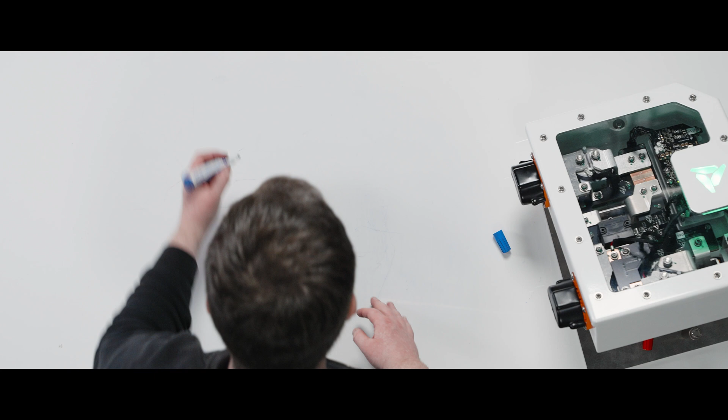So if we're to talk about today's most common fuels used in industrial markets, that's diesel. Diesel has an energy content of around 13,000 watt-hours per kilogram. It's a fantastic fuel, one of the most incredible substances in the world today because of this incredible energy density. The very best lithium-ion batteries that exist today at a cell level, not even accounting for the weight of the battery and everything else around it, is around 250 watt-hours per kilogram. This is an order of magnitude difference in energy content.

It's huge, nearly 50 times lower than what we get out of diesel fuel today. That's the first most important thing when we think about fire safety: the energy density of diesel fuel versus batteries is dramatic. That means that if something goes wrong with a tank of diesel, it's going to create a much larger thermal event, thermal incident, than an equivalent amount with a battery pack. Some of the big misconceptions with battery packs is that they're very difficult to combat the fire, very difficult to put out, and I'm going to speak in detail as to why that is. In some cases it can be true if you deal with the fire in the wrong way.

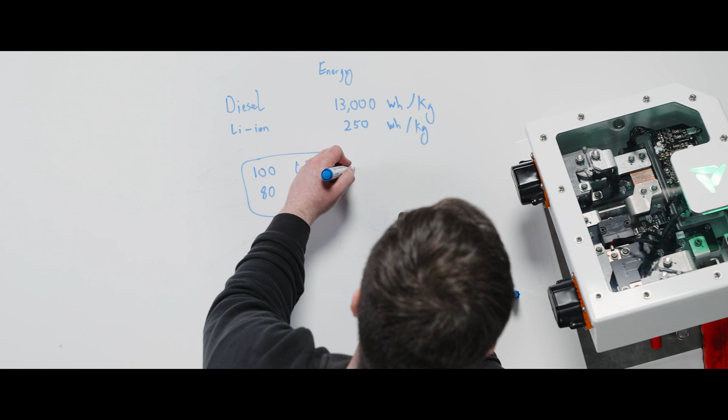So if we just use a simple example here of an industrial machine with a 100-liter fuel tank, that's approximately 80 kilograms of diesel. Multiplying 80 kilograms of diesel times 13,000 watt-hours means that this system, this 100-liter tank of diesel, has basically got 1 megawatt hour of thermal energy. That is a huge amount of energy in that system in comparison to what a battery could carry.

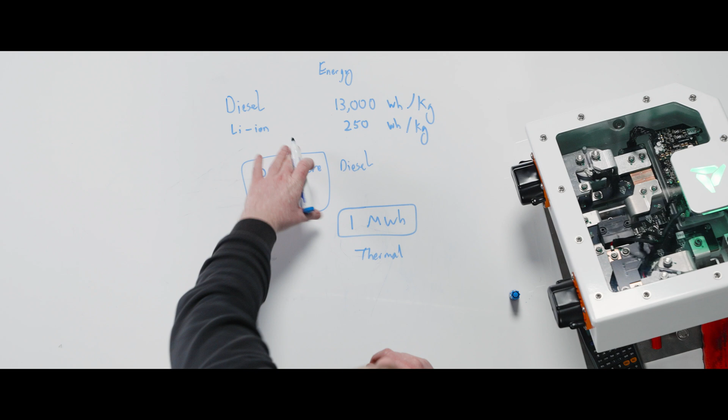The difference between diesel fuel and the battery is that the firefighting methodology we use for diesel is very different. By suppressing a diesel fire, by covering it in foam or blocking oxygen to it, you're able to put this fire out and maintain it in a completely extinguished state.

The difference with a battery is that in some cases it can be self-oxidizing. It's able to generate its own oxygen internally and continue to burn, but the most overlooked piece is that it's electrical energy. There is electrical energy stored inside of this battery cell, and that means you've got multiple modes of thermal runaway, multiple modes of fire generation, multiple modes of heat generation.

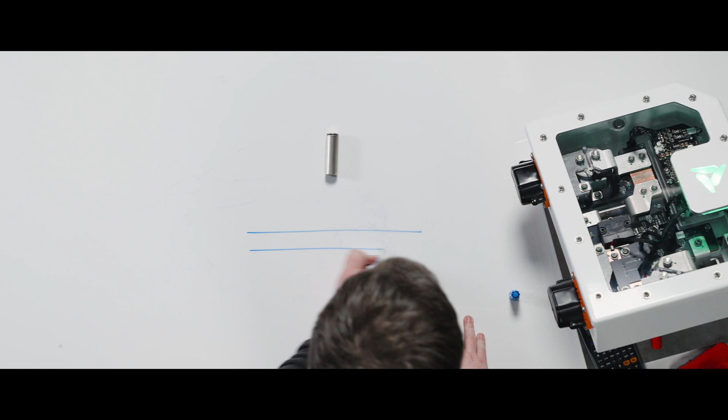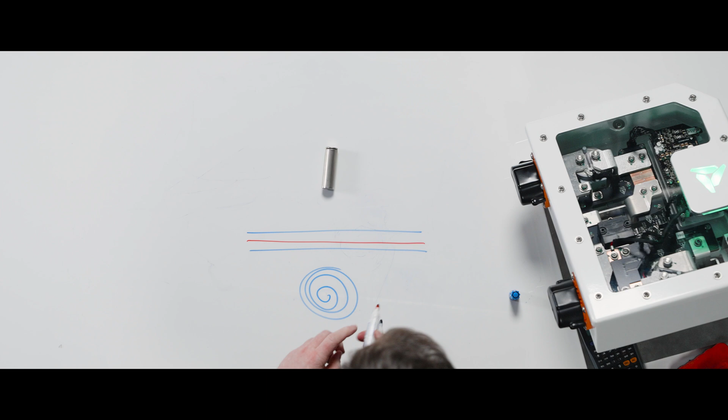So if we look at what actually happens in a lithium-ion battery to cause it to go on fire, it's quite a nuanced set of things that happen. Inside of a cylindrical battery cell, as we've shown in previous videos, it's basically something called a jelly roll. It's basically a plus and a minus, separated in a flat sheet. This flat sheet, in the case of this cylindrical cell, is wound up into a spiral, which enables you to have a functioning battery.

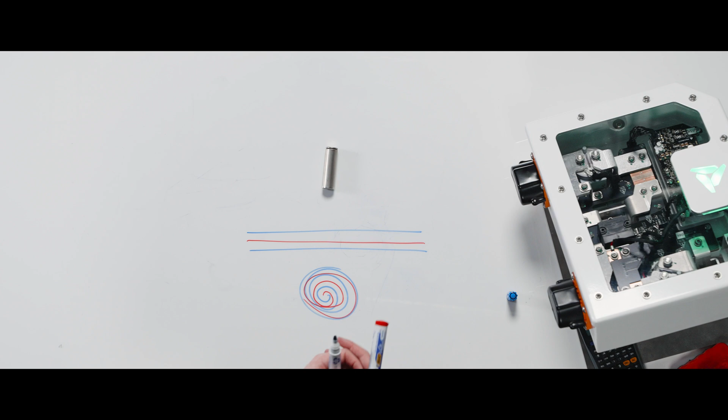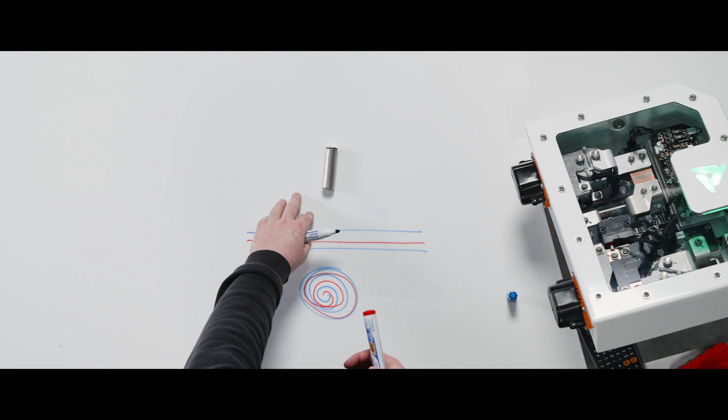This is containing electrical energy, and similarly, this red separator is a plastic. It's a little polyethylene separator material. A plastic can burn, it's like a hydrocarbon. You've also got electrolyte in there, a small volume of liquid that's quite combustible. It's almost like an organic liquid, like diesel, but only a small few droplets of it. So within the battery cell itself, there are things that burn.

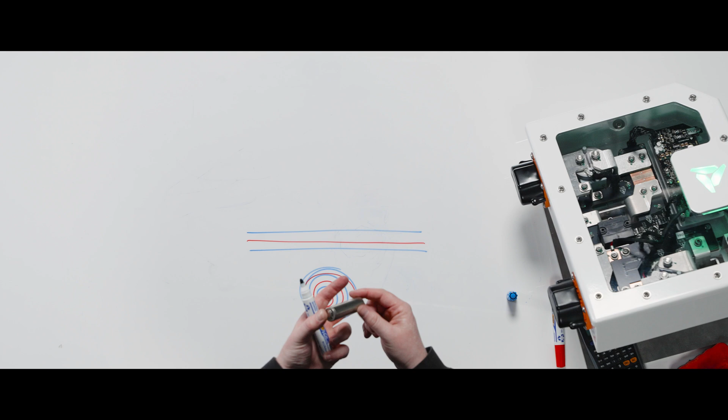It's like oil, there's almost a small bit of oil inside of the can before you even consider all of the electrical energy. So the electrical energy is the second piece here. If this battery cell were to catch fire and you're able to break down the separator and cause these two sides to touch, you're going to create an electrical short circuit. An electrical short circuit can generate a lot of heat because the current flows through resistive heating and builds up temperature very, very quickly.

So you can get multiple things taking place at once. You can get electrical shorting generating heat. So it won't generate a fire, it will generate heat and burning. That heat and burning will cause the separator and the electrolyte to catch fire, which then causes venting and gas generation, which causes more separator to fail and more electrical energy to be released. So when all of these factors come together, you can and do get thermal runaway. You do get venting of battery cells and fire.

There's a lot of different technologies on the market today to try and reduce this. Some things to consider: even within this plus and minus, your anode and your cathode, the materials used there have different stabilities. They're chemical compounds. If they get above a certain temperature, they break down, they decompose into other materials that are often flammable. So when we talk about different chemistries, LFP is very safe, it doesn't go on fire. LTO, you can put a nail through it.

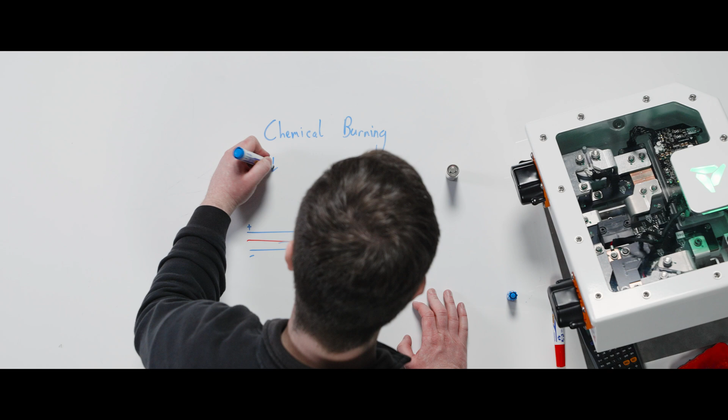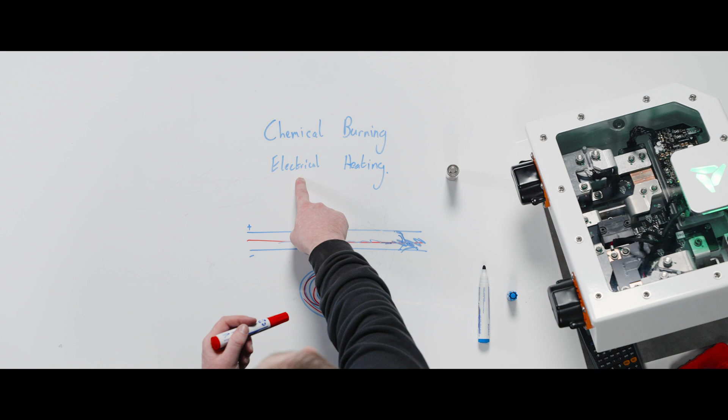But I have to be absolutely clear, given the right conditions, you can make any chemistry burn, thermally run away, or create a fire event. So understanding these two different effects inside of a battery - there's the chemical burning, there's electrical. The second one is the big difference from diesel. So when we talk about lithium-ion batteries versus diesel, diesel's got chemical burning, but it has no electrical heating.

The electrical heating is the source of most of the confusion on the market today. It's the source of most of the very interesting news stories and firefighting mistakes - that electrical heating, and the fact that the energy is always there, always on, can lead to a very key behavior that needs to be mitigated.

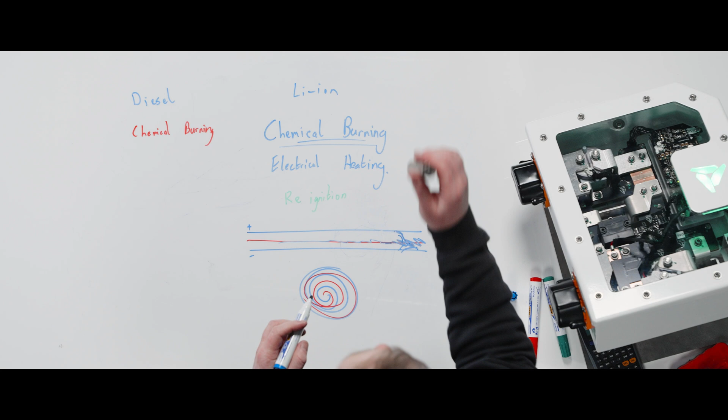That key behavior is reignition. The important thing to think about is that if you're able to cause chemical burning of the battery, you can extinguish that burning with any standard conventional method. You can put water on it, block the oxygen, and the battery cell will go out. The fire will stop, no different to a diesel fire.

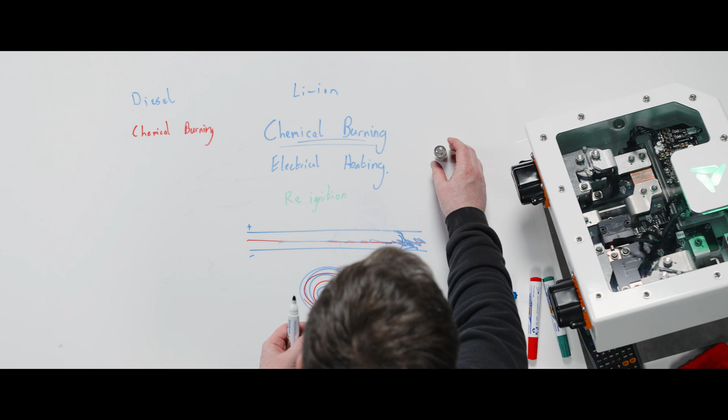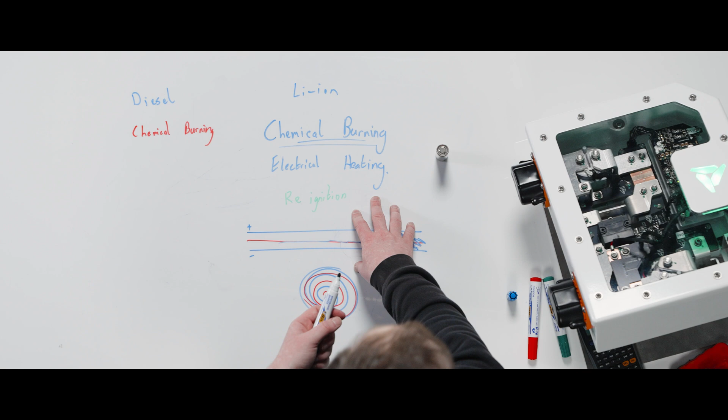The thing you possibly haven't achieved is there's probably still electrical energy inside the battery cell. If you've still got electrical energy and a compromised heating path, you've put out the chemical burning fire, but the electricity is still flowing, creating heat effects, and that might be enough to reignite a chemical fire seconds, minutes, hours, or even years later, as a latent defect. So you need a form of permanent suppression to ensure these systems can be made safe.

So that's what we're going to talk about next: first responders, what you should do, how you tackle battery fires. If you come across a vehicle, a battery, a system, this is based on the best practices we use here at Xerotech. There's a lot of information out there publicly, a lot of different scenarios, but what we advise our customers, the Xerotech philosophy, is based on real fires, real testing we've physically done ourselves. I personally have fought multiple lithium-ion battery fires during design, development, and intentional abuse tests. These are methods we've directly seen to work and be effective.

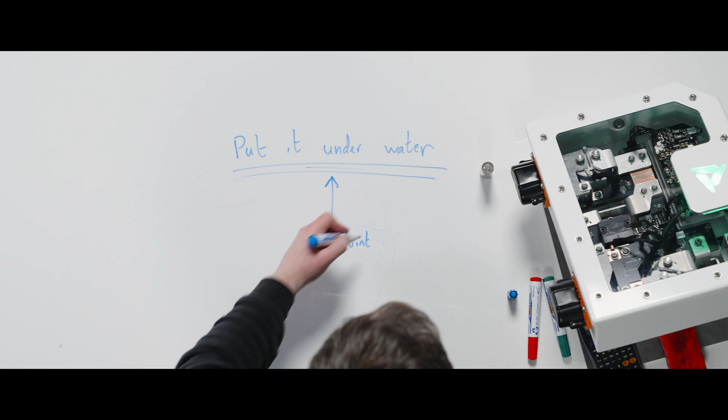The real simple case of how you deal with every battery fire: we have one rule, put it underwater. This is the simplest, most effective way to deal with a lithium-ion battery fire. In every case, irrespective of chemistry or anything else, this is the permanent solution to make a system safe. Everything else you do combating a fire should lead to this end point. Get the system underwater. That will put out the battery fire, suppress it, and make it safe for days, weeks.

These are some of the challenges with many solutions being sold on the market today, like fancy fire extinguishing agents and other strategies. They can usually deal with the early minutes or hours of a fire, but the problem is that real lithium-ion battery fires eventually end, and at some point everybody goes home. That's where the real danger happens, when something is left somewhere. What happens in the middle of the night or a week later when nobody's there? You need permanent suppression, a permanent solution, and that is the simplest, cheapest, most available solution in the field: fully submerge it underwater.

All the other approaches, like fancy fire extinguishing agents, blankets, everything else, are there to buy you time. They make the incident less severe so you can ultimately get it underwater, get it out of a vehicle, put the vehicle underwater, whatever the solution is. But the end point is to get there.

What should you use on a lithium-ion battery fire? Should you use special fire extinguishers designed for lithium metal fires, or fancy salts and suppression systems? Again, based on Xerotech's experience and all the fires we've combated, our recommendation is really simple, and that answer is water. Water is the most effective solution for knocking down a lithium-ion battery fire.

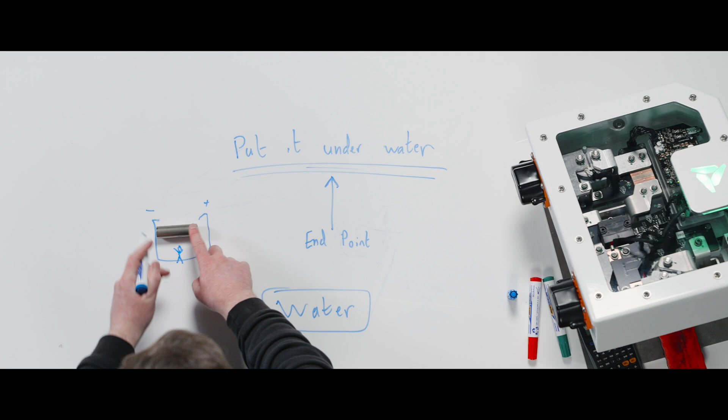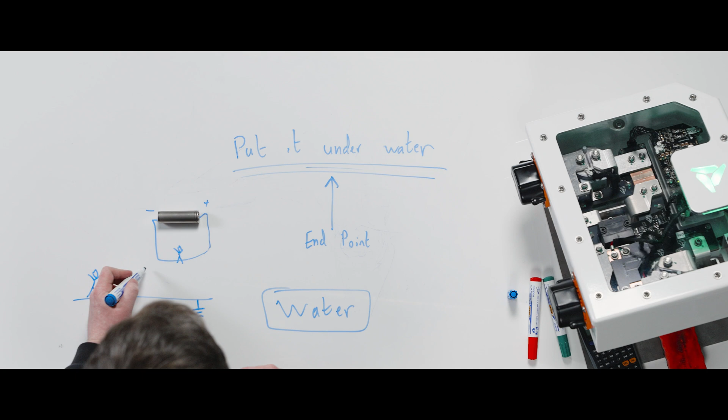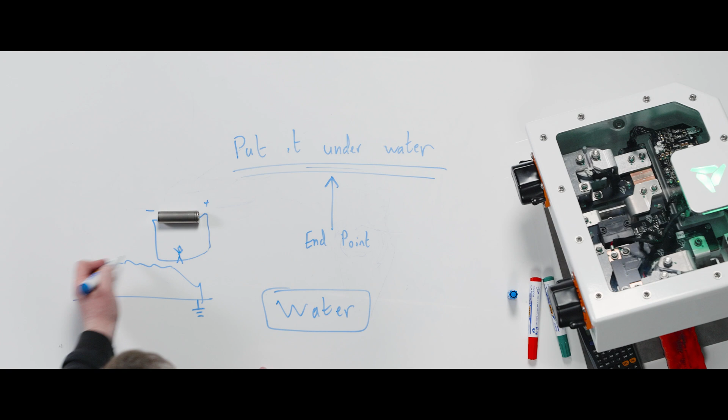So if you've got a fire hose, you'd have to somehow create a loop where you're in the middle and join these two things together. That's incredibly hard to do for a floating battery system. The reason you don't spray water onto an electrical panel is that you don't need to connect the second half of the loop, since half the system is already grounded and you're standing on the ground. So if you've got an electrical panel, one side is doing something while the other is connected to ground. If you spray water onto that panel, you're creating the loop and you're in the middle of it.

That's why you never do this with a ground-tied system or a system that's not floating. With a battery, it's very hard to achieve that. So in this case, if you spray water on the battery, you will create a joining of the circuit, but you're not going to be a part of that circuit. It's going to be inside of the battery box, internally shorting and dissipating its energy.

That's actually part of the mitigation strategy for putting it under water. You leave it under water. So to come back to a practical solution of how you put out a fire, we'd recommend as a general rule, if your battery box is a certain size, put it in a volume of water that's at least more than 3x the size of that.

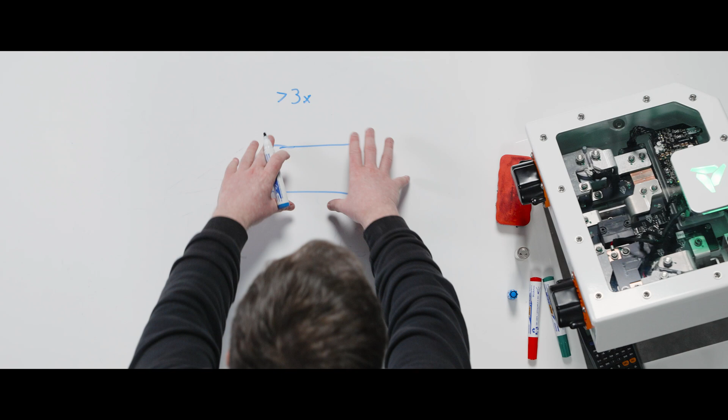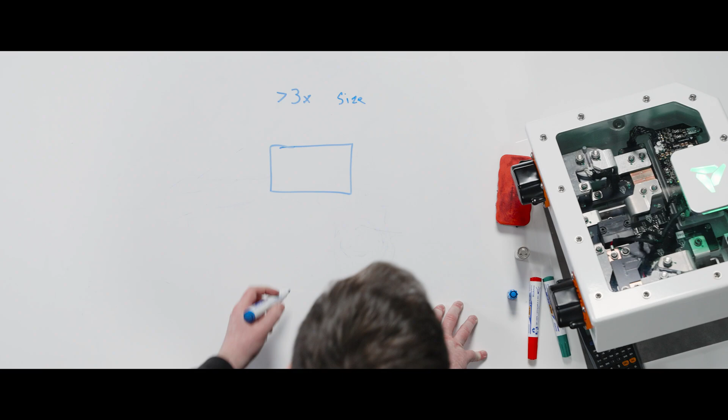There's a number of different reasons for this: if you have it in a small pool of water, there's not enough thermal mass in that water to keep the fire quenched down. So you want to have greater than 3x the size of the pack, and you need to think about practical solutions of how you'll do this, especially in a field application.

Oftentimes these are achieved with metal containers. Waste refuse skips are some of the most effective solutions we'd recommend for customers and early integrators - have a standard metal refuse bin, large skip, put the pack in it and flood the skip. Other effective solutions are large roll-on, roll-off skips that can be lined with a tarp to basically create a swimming pool and put the packs inside of it.

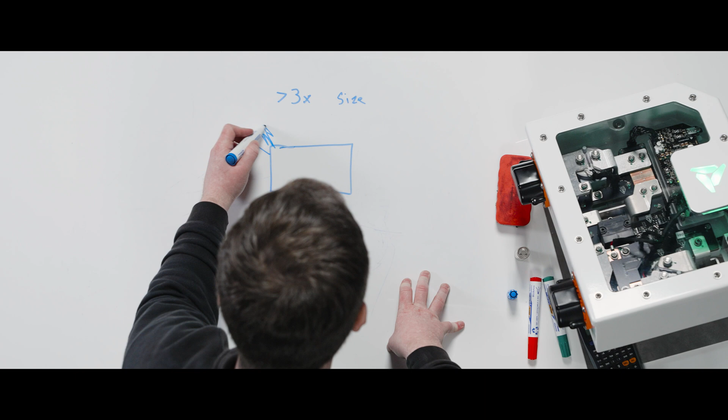By spraying water on the pack, if it's venting or flaming or whatever the solution might be, this will knock down the flames, but it's likely going to be temporary. You have a high risk of reignition by just externally dousing a pack with water. But it'll buy you enough time to get it somewhere more safe.

So that's the second piece with lithium-ion battery fires. One of the most important things is early intervention. The worst thing you can do is let it burn more and more and more. So if there's an opportunity that this is a recoverable situation, you want early intervention.

This is incredibly important. Within batteries, we're very lucky that the fuel is not a liquid fuel in one tank. A diesel tank, like we spoke about, an 80-litre, 100-litre diesel tank with 1 megawatt hour of energy - it's one volume of diesel. If it goes up in one place, it's very hard to segregate it.

If a battery is designed well, you've got lots of little diesel tanks. For example, in a 1 megawatt hour system, that's probably 10, 20, 30, 40,000 battery cells, individual cells. So that 1 megawatt hour is divided by 40,000 times. That means that if you can intervene early, you can stop the domino chain reaction within the pack.

But again, spraying water on it will only eliminate the chemical burning. It is unlikely to stop the electrical shorting, which can reinitiate chemical burning. The problem here is that water does in fact promote further short circuits. So the water is in some cases going to make things ultimately worse for a short period of time. So water is what you do at the final point.

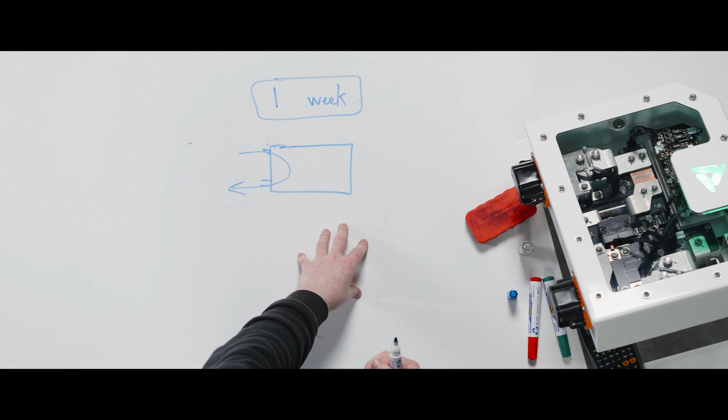The reason water is so effective compared to any other solution on the market is the thermal mass of water is probably twice as good or strong as any other material known to man. Water is the most effective firefighting material that exists, and it's widely available, well known. We strongly recommend the use of water in combating battery fires.

One of the other considerations with lithium-ion batteries, and a watch out, is when batteries fail, they don't typically start by catching fire and burning. They typically vent, meaning they vent a hot gas. The battery cells start to decompose, and the electricity inside is cooking the liquid electrolyte, turning it into a combustible vapor.

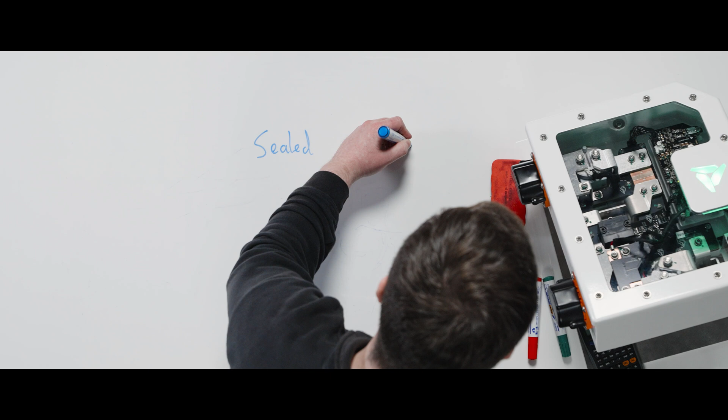A very dangerous situation you can create when you don't understand how to combat battery fires is taking a battery and putting it into a sealed compartment. This is not a good idea. There's a big difference between putting a battery in a sealed compartment and putting it underwater.

The water will knock down the thermal runaway. It will stop the gas generation. It will stop the fire. It will cool down the heat.

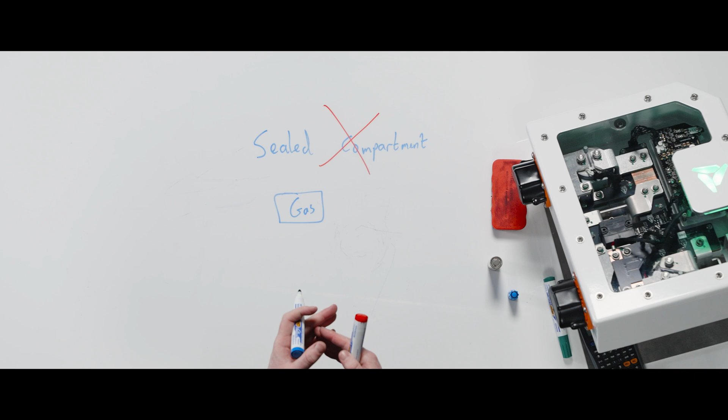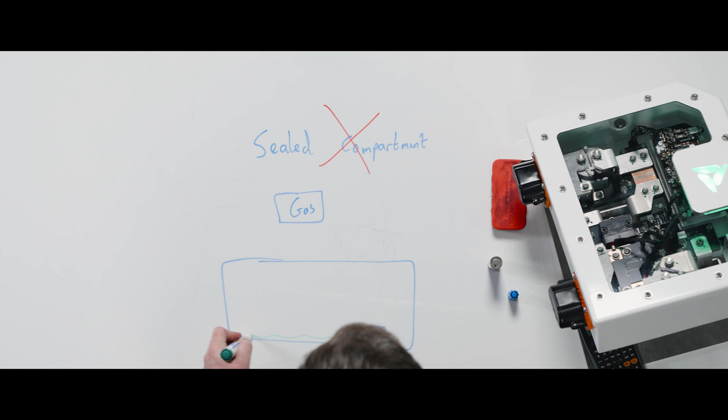When you place a battery in a sealed compartment, and we've seen this several times in container situations, if a battery is in a container and it's venting, you build up gas, and this gas can be combustible. The risk is that as it starts to engulf the whole container in gas and build up a certain concentration level, you build up quite typically a lot of hydrogen inside that space. If you have a spark ignition of that hydrogen, you can get a temporary ATEX or explosion hazard. It'll be a sudden pop, a hydrogen bubble pop, that will in some cases overpressurize the container. It could swing open the doors of the container or pop the lid of the battery box.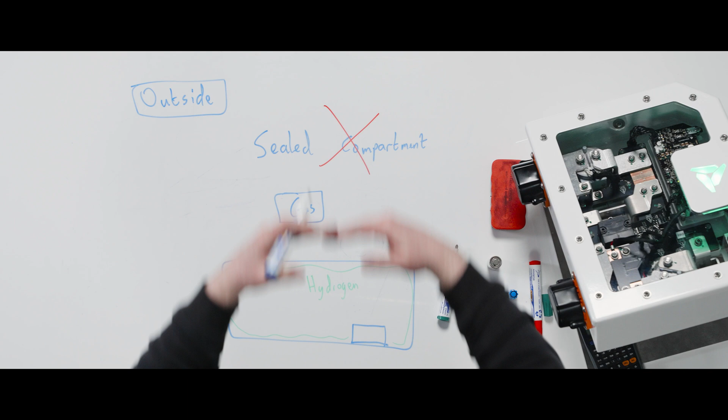It's very important that if a system is failing, you want to make sure it's in open vented air. So as part of the chain of how you deal with these issues, you want to get it outside if possible. For example, in a production environment, you want it in an outside area. You want to be keeping the smoke, gas, and fire generation down. So, water on the pack, and then the final piece is submerge.

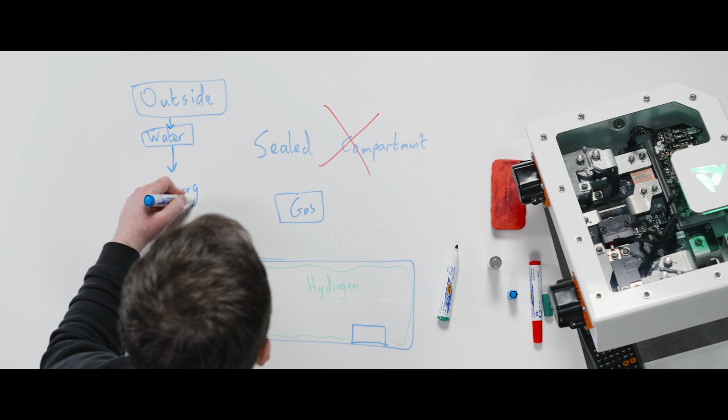We strongly recommend never ever to store failed battery packs in sealed enclosures or sealed containers. The safest solution is to leave it permanently submerged and recycle it, or else leave it in open air and cover it with some sort of fire blanket or protective covering, but not something that can create a pressure vessel scenario.

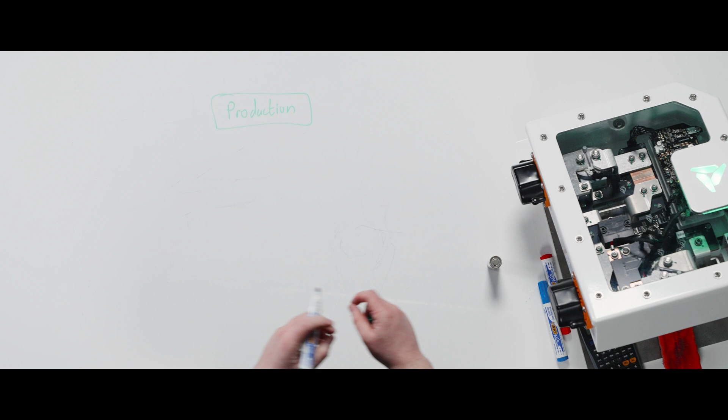So to summarize, you've got two major scenarios that you'll encounter battery fires. You could encounter a battery fire in a production type environment, if something goes wrong, if a battery pack is dropped on the production line or a forklift operator drives through it or something like that. And the second one is in the field.

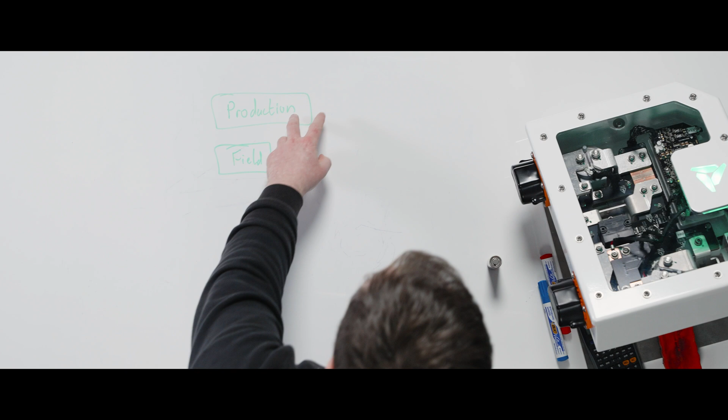In a production environment, the solution is generally very straightforward. Get it outside, get it underwater, use water as a containment.

In a field application, it varies very widely on what to do. Typically, if it's a smaller size vehicle where the battery is just one battery in a vehicle, you may want to douse the battery with water so that it can potentially be removed from the vehicle, contained enough to make safe. Potentially you can partially submerge a portion of the vehicle if this is practical. For larger systems, depending on how the OEM integrates it and designs it, you might design in cooling ports that you can flood the pack for first responders, if that's the most sensible thing to do.

So we've talked quite a lot about how to combat a lithium-ion battery fire, but one of the most important things to look at, particularly for Xerotech battery systems but not just ours, is there's a lot of interesting things these battery packs can enable, particularly in markets that experience very adverse or abusive conditions. One of the big advantages of battery packs is the small units of energy, which mean these systems can often withstand a high degree of damage and still be somewhat operational. This is very interesting for some markets.

So in those markets, when you've got a fire in the system, for example with a Xerotech battery system, there's a very high likelihood we're going to passively suppress that fire and you can maintain operation. But even if it is a runaway event and it continues to happen, this is likely happening over a period of time - it could be minutes, hours, or even longer. That gives the user a huge amount of safety benefit to exit the vehicle, complete their mission, continue the use case, and put the whole system into a safer mode of operation.

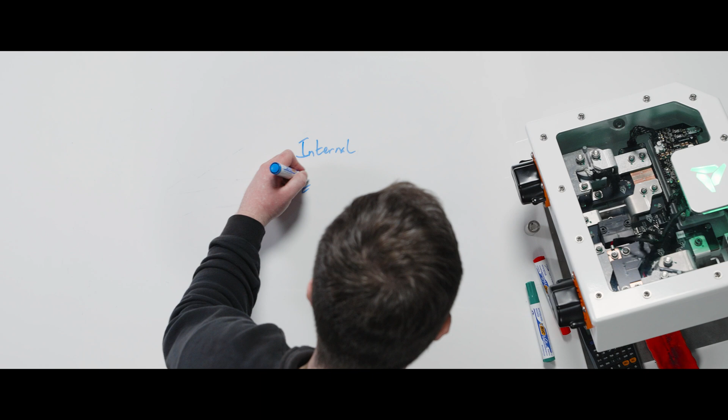But how do these things actually start in the first place? You can generally categorize it into two categories - internal and external. The internal mechanisms are always the same: you've got to generate heat. If you generate heat, either through chemical methods or electrical methods, that's going to ultimately lead to fire given the right conditions. So internally generated faults are always initiated electrically, because there's no way to internally generate a chemical fire.

So internal faults could be manufacturing defects, which are incredibly rare and uncommon. The largest battery manufacturer in the world, a major Chinese battery manufacturer, just recently released a large data study of their cell quality. They've estimated that their failure rate of cells is 1 in a billion cells. That is an incredible number by current modern quality standards. So internal faults are incredibly rare within the battery cell.

But how it could happen is if you have a defect creating a small internal electrical short circuit that causes heating, that causes burning, that starts to burn the chemical fuel inside of the cell, that can then lead to fire. So we try to mitigate these things through having very high and rigorous standards of cell manufacturing quality. We do extensive quality checks, as a battery manufacturer, to make sure the cells are good - and this is after the cell supplier has already done that.

Then afterwards, we wrap a lot of safety systems around it to plan for the worst - what if it does go on fire? In our case, we have foam suppression, passive suppression, and many other features to knock these things down. So the internal faults are incredibly rare.